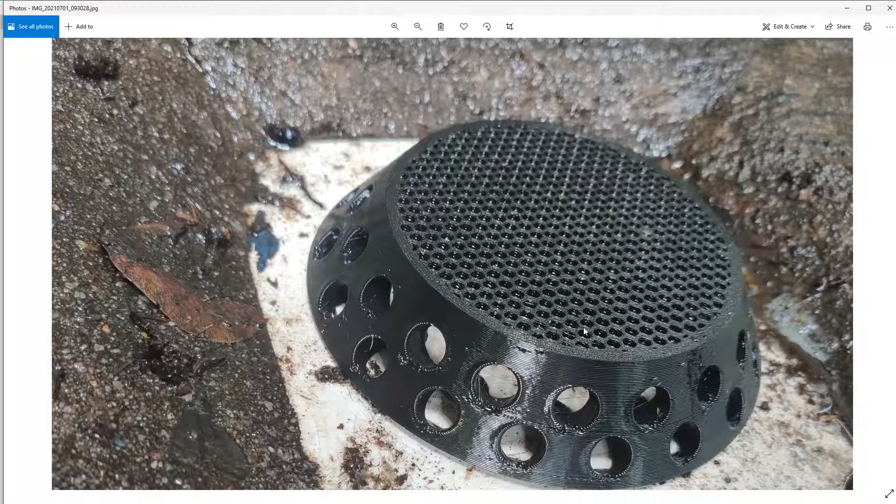What we're gonna do tonight, we're gonna do this drain cover I did. I got some outside steps on my basement, and it likes to get clogged up with leaves because I got enough trees out there. They drop leaves and it's constantly clogging up. This is what I designed. This is what I was working with. Let me see if I can figure out. Nope, not that one. That's what I've been working with. That's what I started. That's what I ended up printing. It basically gives us a lot more surface area, a lot more holes to let the leaves clog up in and let the water still flow through before it ends up in my basement, because that has been a problem.

Oh yeah. By the way, this tutorial, I finally figured it out. It's basically when you go into the bar and you end up sitting next to that dude that won't stop talking about what he's done. Well, have yourself a beer.

We're gonna walk our way through this. We'll try to do it kind of quick. Try to keep it less than 20 minutes. But at the rate I'm going, that ain't gonna happen. I'm gonna try though. All right, here's what we got. This is what I'm starting with. This is what gets clogged up all the time. We got like 12 holes. I counted them. You can count them too. You can hit pause. Go ahead and count them.

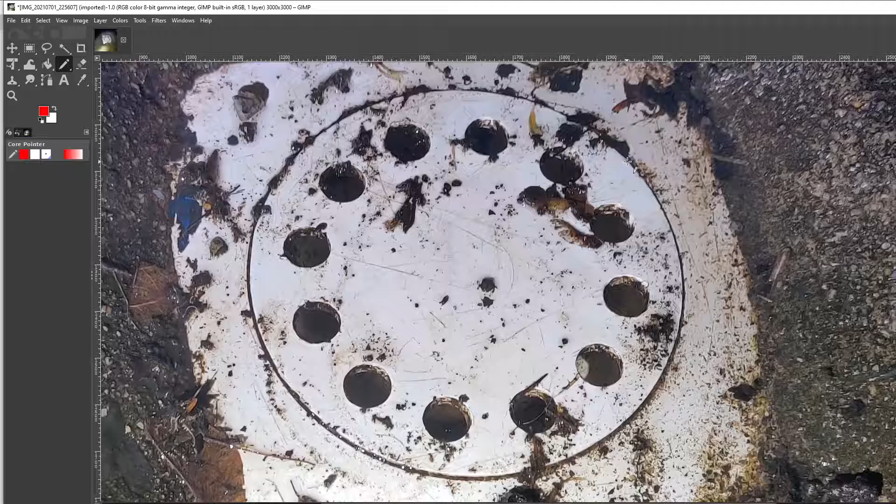I don't care. But basically, what I always like to start out with on the drawing is what I'm starting with, what I got existing for features. So basically, I ended up measuring this diameter right here. That was 115.73. It doesn't really matter if it's that precise, and it doesn't really matter if you can read what I wrote on the screen or not. The other thing I measured is the size of these holes. These holes, they are 12.55. It's easy for y'all to write because y'all ain't doing it and getting recorded.

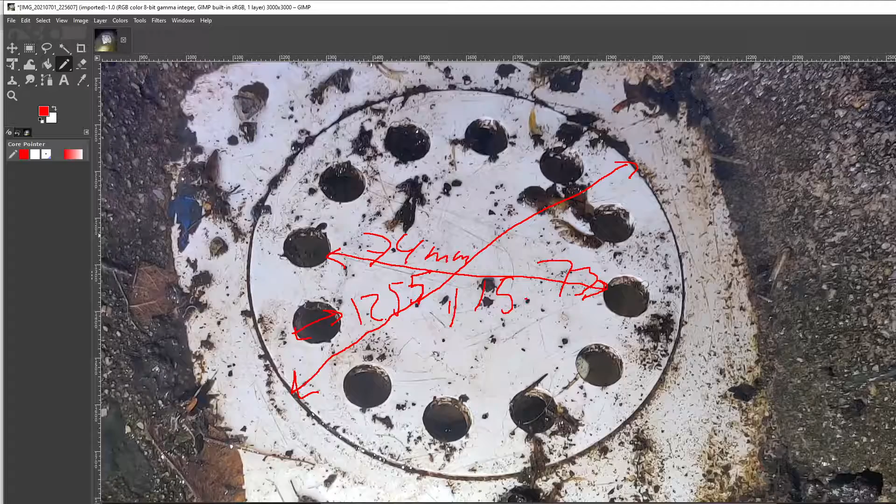The other thing I measured was basically from the inside of this hole to the inside of the opposite hole, and I measured that at 74 millimeters. All of it's in millimeters. I don't know why I felt like adding millimeters to the end of that one. All right, so that gives you an idea where we're starting out. We're gonna close that one, minimize that one. This is my end design. I can kind of walk you through it in steps. We'll just go through it on a new build.

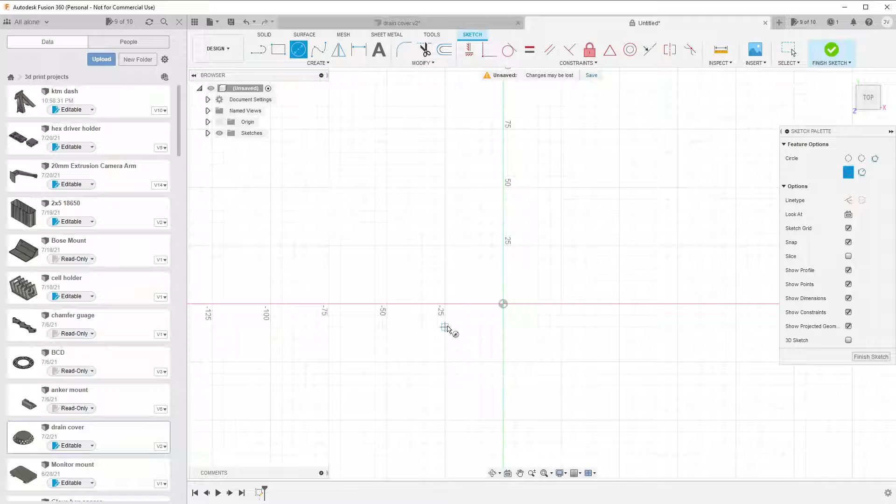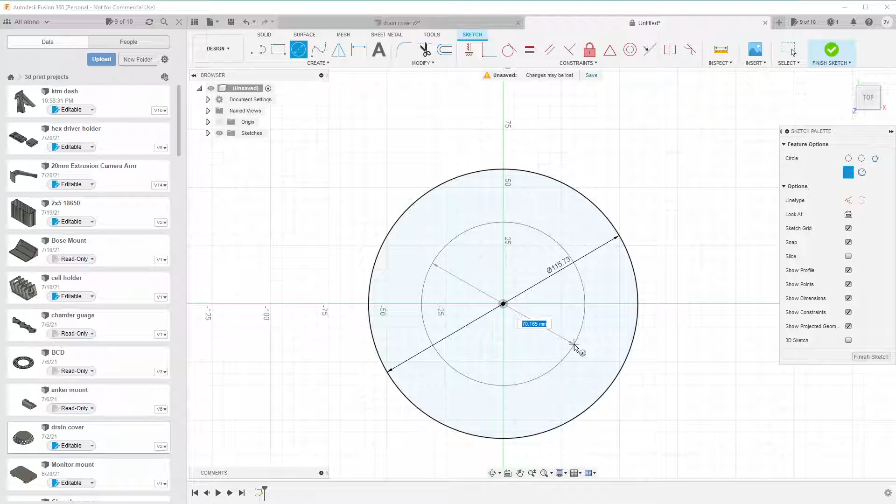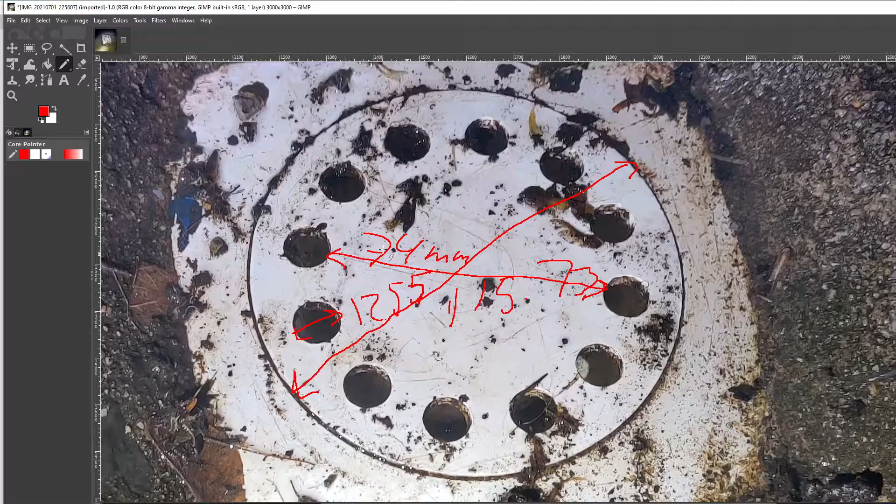We're gonna do a sketch. We're gonna start in the XY, and we're gonna do a circle. First one is gonna be 115.73. That's our diameter of the whole thing. This is how I like to design. You can do whatever you want to. All right, next diameter. We're gonna start from the center, and what we measured was the inside diameter of those holes. Let me go back. Hold on a second. Sorry, man. Beer got in my way. Go back to this one. This hole. I had that as 74. Yep. I'm gonna double check everything. So we're just gonna type in 74.

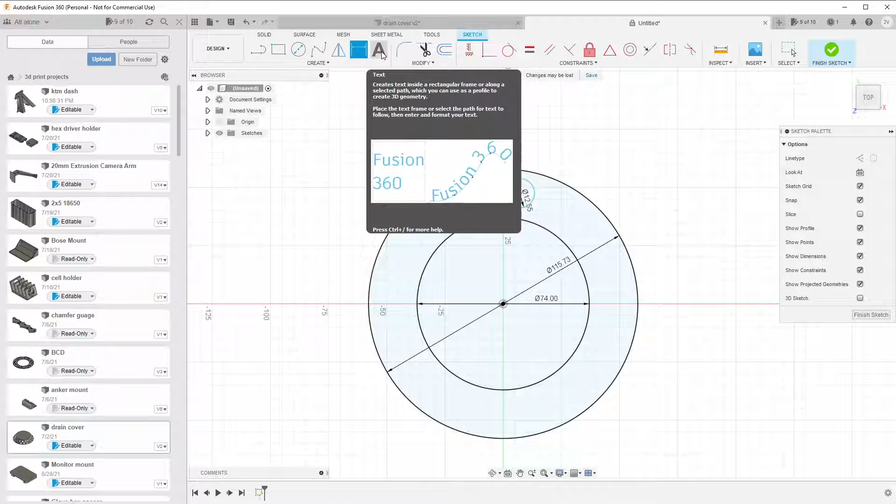All right. We don't actually need to design anything off of that. So what we can do is, well, you know what? It doesn't really matter. We can do a circle, and I have the actual drain holes. They were 12.55. So we can drop one here. No, that ain't exactly right, but we'll go here. We'll go and dimension that with sketch dimension. Click on there, and that was 12.55. Enter, not shift. I hit shift, in case y'all couldn't see my keyboard. And I know y'all can't see my keyboard. Alright, so that's 12.55.

Now we're gonna do this. We got these constraints here. We can tie everything down. We can tie this dude down to here. So basically, we got this tangent of this, tangent of that. Basically locks it down. All right, we're still stuck in tangent mode.

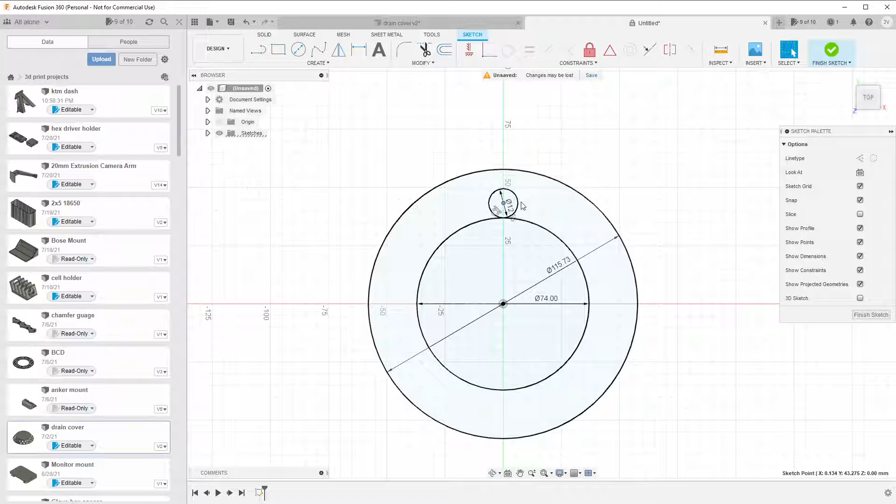So basically, we move this thing wherever along the tangents of that. We can line it vertically. We can do whatever we want to with it, but that's good enough because basically there's 12 of those holes. It doesn't matter exactly where they are. So we can do a circular pattern on that. Circular patterns are kind of your friend if you're doing something regular.

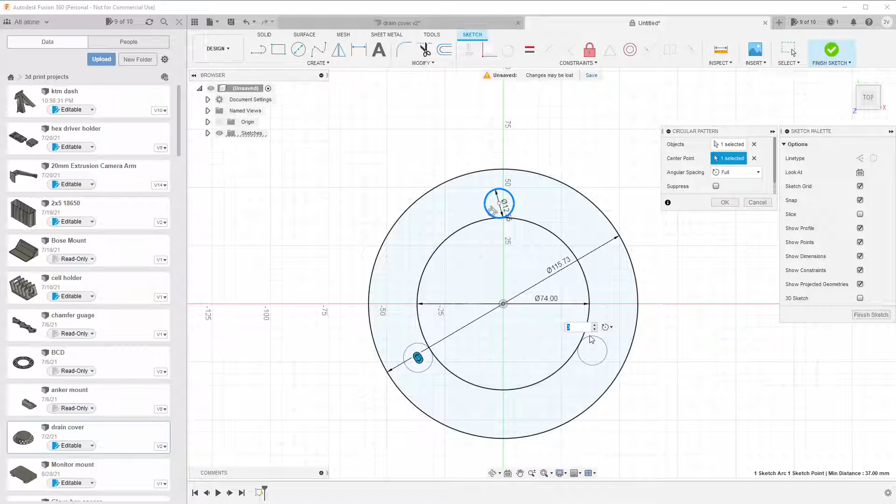Circular pattern objects. It already selected that one. Well, no, it selected the radius of that one. But we can hit the X. We can hit objects. We want that dude. Center point. We want that dude. By default, for some reason, it picks 3. We got 12 of those holes. Alright, that gives us a nice 12 of those holes.

Angular spacing, full. If we wanted 12 of those holes in half of it, we can do that. We can play around with all this. I encourage you to play with all that. But basically, center point is what it's going to revolve around for that circular pattern. There we go. Center point. Yep. Okay. All right.

Y'all gonna have to forgive me because I'm gonna switch back and forth between drawings because I already done this a few times and having a hard time keeping it down to like a reasonable amount of time. All right.

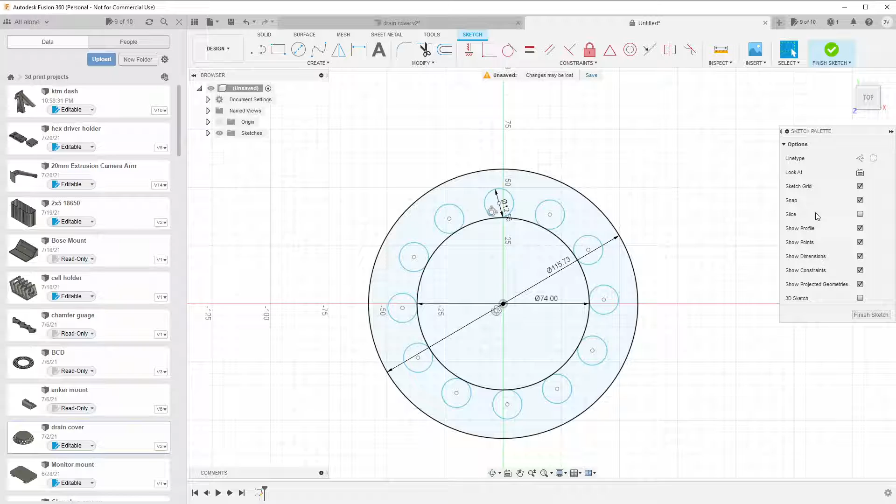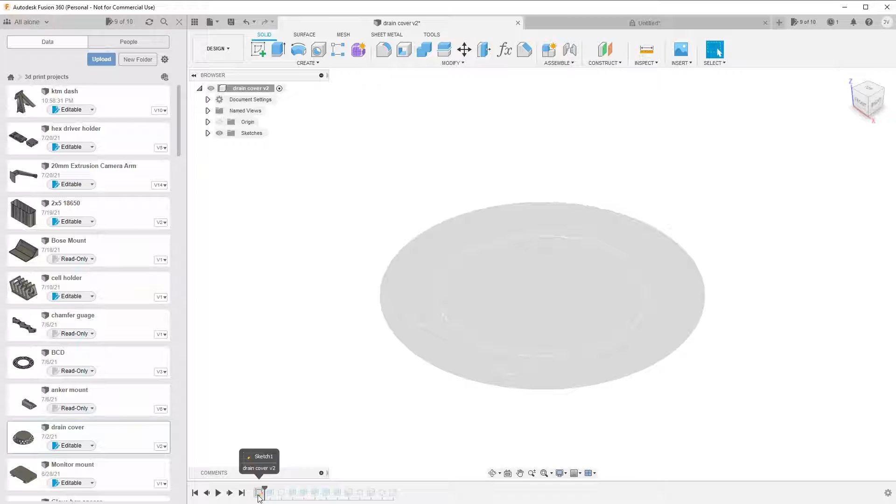Next step. I ended up extruding that. Let's see. This nice thing about Fusion is it's got this history marker. You can drag that back and forth. I clicked on it and drug it, but it wasn't having any of it. We can go back to my drawing here. Let's go there. We'll click on edit drawing because it's basically what's hidden. We'll go to edit sketch.

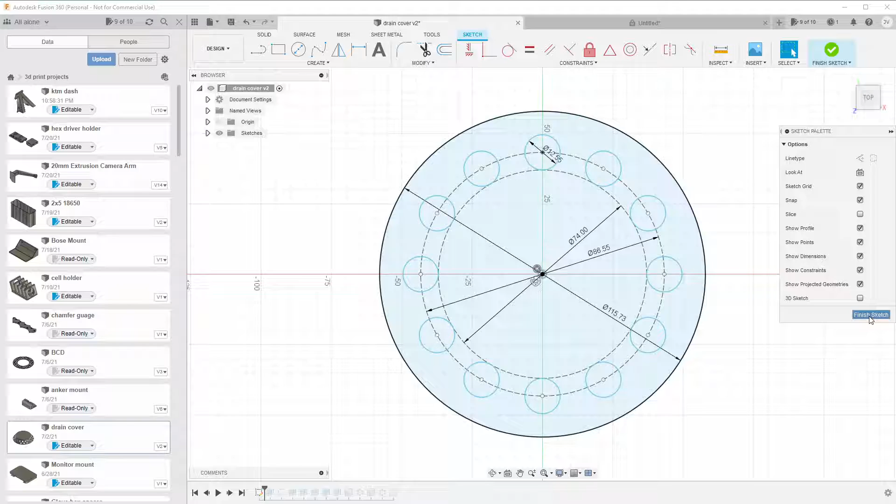I did a little bit different than the first go around because I added in and made it center radius and did all that happiness. But we can do it the way I just did it. Actually works just the same. And then basically what I did was extrude it out so I got a surface to look at. You stop. Maybe it's gonna work. Oh, we gotta hit finish sketch. So it can all disappear. And we won't be able to see shit. Alright.

You know what? I'm just gonna drag it to the end. We'll go through each piece. It works. It's just you got to go through here. You got to open up bodies and open up origins and sketches, and you got to do all that happiness. So basically, let's edit feature. We can see what I did with it. We can see I extruded it 5.14 millimeters.

I actually think I measured that because that's a bit too specific a number for me to just pull out of my ass. I mean, I can pull numbers like that out of my ass. I can pull beers out of my ass too, but don't mean I'm gonna drink them. All right.

So 5.14 millimeters. I extruded it. That gives me something solid to work against.

Sorry, I was getting thirsty. All right.

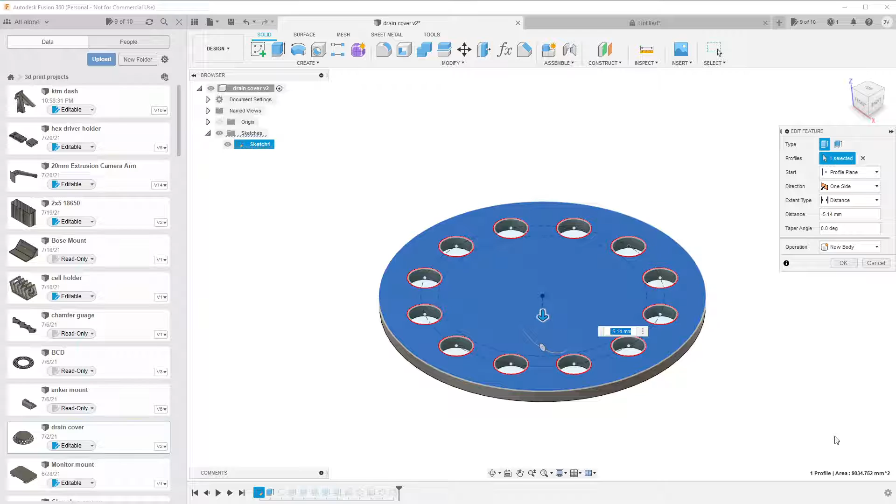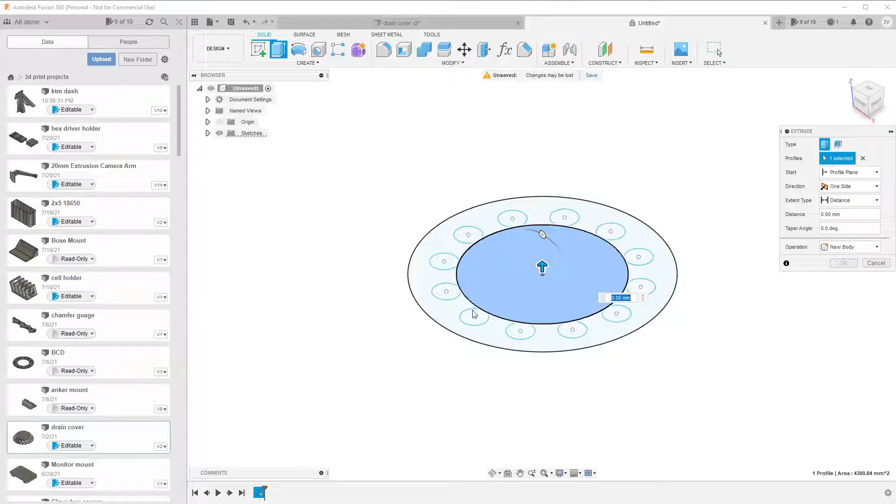Next thing I did was I created a sketch off of that. All right, let's go back to this one. Let's go ahead and extrude this one. Hit finish sketch. Let's do an extrude. Extrude. And select this. Basically, we want to extrude all this. I'm just going to go 5 millimeters because that's a nice even number. That gives me a solid to work off of.

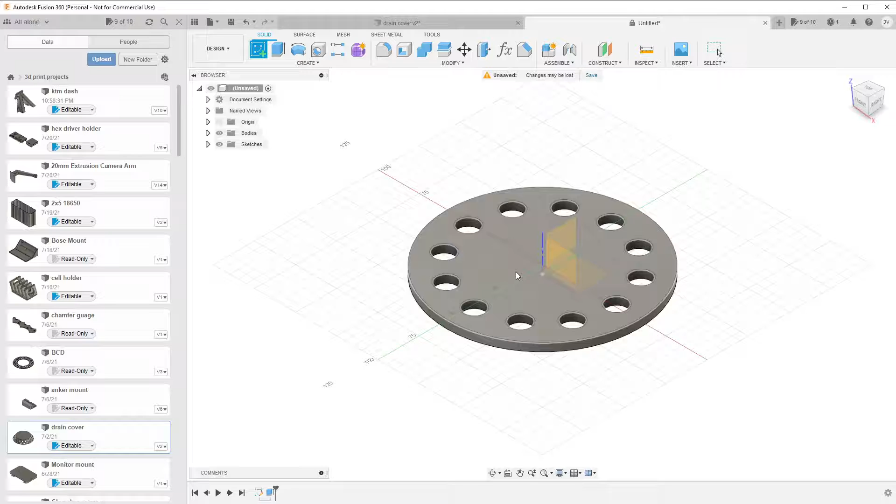Alright, next step. Where was I? Oh, we had this dude. Don't ask me why it looks like that. Alright, so basically I want to do a new sketch. I want to do it off the surface of this. Because when I do it off this surface, it references all this stuff. I get references to all these circles. I get references to basically everything in that solid.

Alright, so what I think I did, here, I did a circle. If it tries to snap to anything, for our intents and purposes, we don't want to do that. We just want to kind of do it in the middle, or we can hold down the control key. That keeps it from snapping to anything. So if we just hold down the control key, we can then just draw that out. And I think I just chose like 5 millimeters for the diameter of that.

And then I want to do the tangent again. So I want the tangent of that one to be the tangent of that one. And that gives us a little post there, because basically what I'm doing here is I'm drawing a little post down that I can reference on that'll kind of lock into that existing cover. Because I don't really want to get rid of that existing cover. It's tough. If I break my little 3D printed part, ain't no big deal. I will not break this part because it's been going strong for 20 years or however long I've been here.

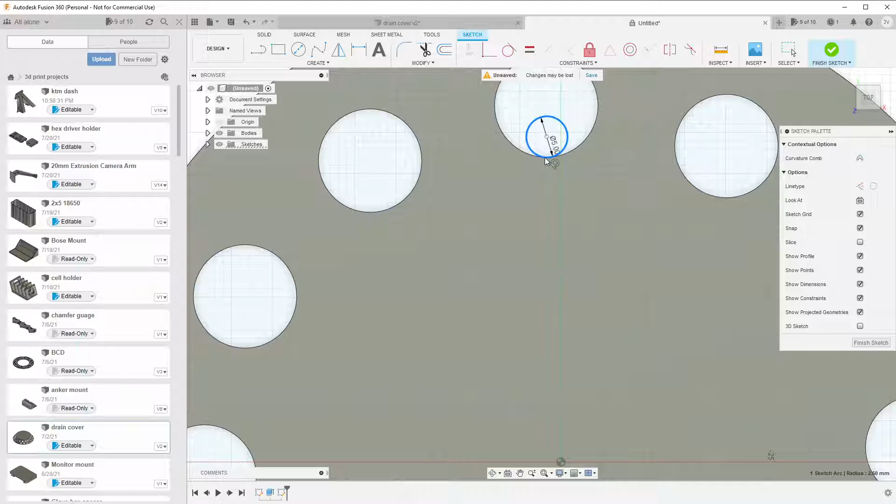Alright, so y'all see I'm still stuck on the tangent. I'm going to hit escape to get out of that, and then I can draw this down. And I'm sure there's a better way to do this, but I'm going to do it the lazy way and the drunk way, because normally I would align this hole with the X or the Y axis, whatever axis that is. I'd have aligned it with that, so we could just line this hole with that axis, and we'd have been done. But anyway, that's how we're gonna do it, because it'll get us close enough. I mean, this is not rocket surgery. We just need to get close enough.

So basically what I'm doing is I'm making little pegs to reference these holes to keep it from spinning, to keep it in place. And I'm gonna do 6 of those. We had 12 holes. I'm gonna do 6 of those. So I'm gonna do the circular pattern again. Create circular pattern. Create that dude. Well, shit, I just deselected that dude. We're gonna select that dude. Center point again. We're gonna click on our origin here, and then we're going to change this quantity to 6. That gets us 1 at every other hole, and that shouldn't block up too much, because we should be catching most everything with our cover that we're actually creating.

And you know what? Let me look at this other cover I got here. Oh, you know what? I created an outside one. Let's check what the dimensions are on that. We get this inspect. We can click on there. Oh, it ain't gonna be happy with me. Inspect. We'll click there. We'll click there. Distance 65. I think that's the diameter. Yeah, that's the radius. Yep. It even shows us on the screen there.

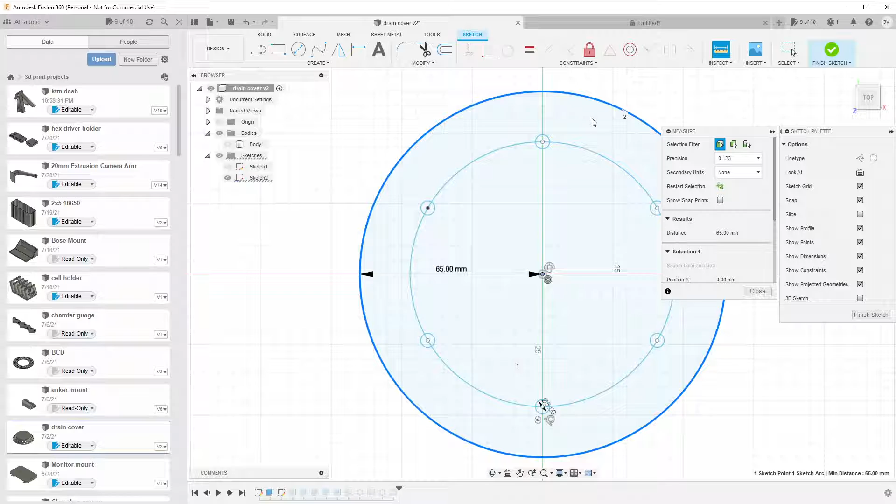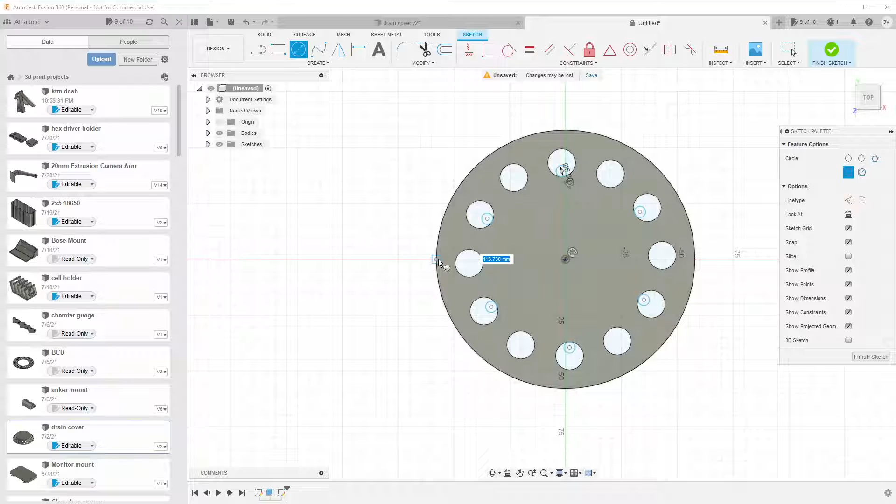All right. So I just guessed 65 millimeters. We made it bigger than what it was. It's showing me that. So let's see. We'll do a circle. That was a radius of 65 millimeters. So we're gonna do 65 times 2, because y'all know Fusion will do math for you. You don't need to do it for yourself. All right, we're gonna do finish sketch on that. Let's see what else I did here. We'll do finish sketch on that one because that's that one.

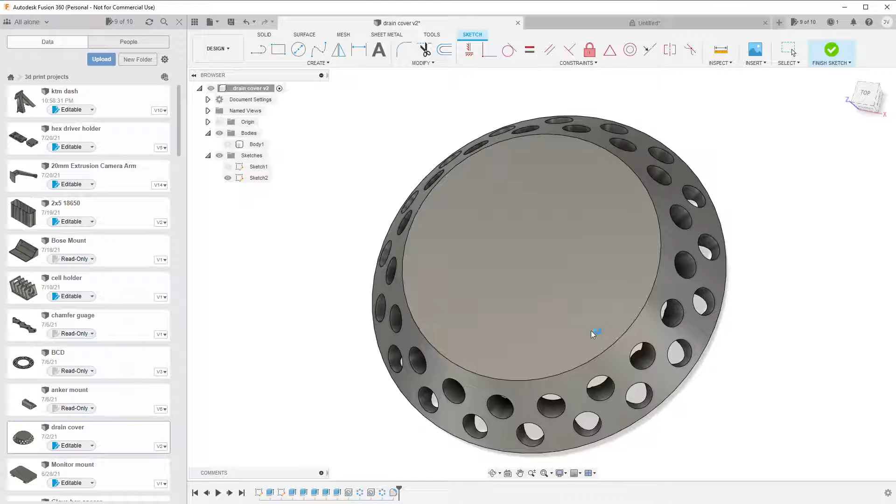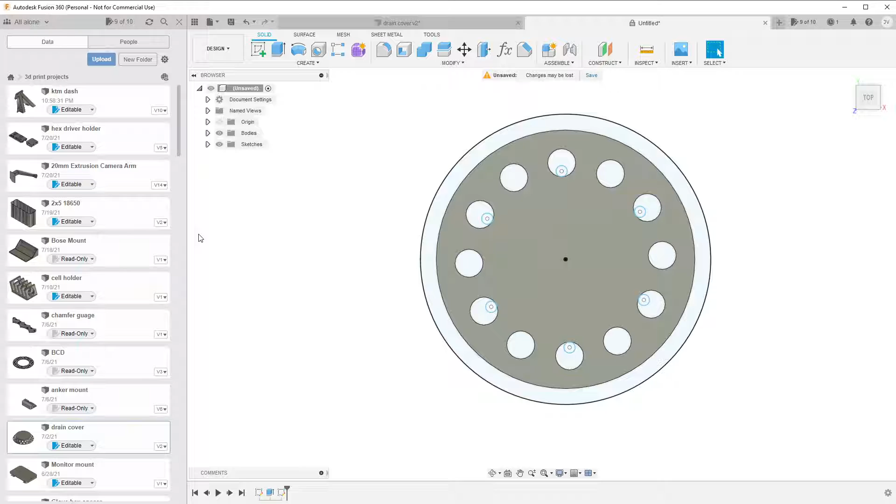All right, what do we have next? We're just gonna slide this timeline. Oh, yep, we did an extrude. We can do this edit feature. I'm gonna go through on this one. We extruded. What did we extrude? We extruded this outer side at 35 degrees. All right. So we can go here. We'll go to this home. Look at this ISO view.

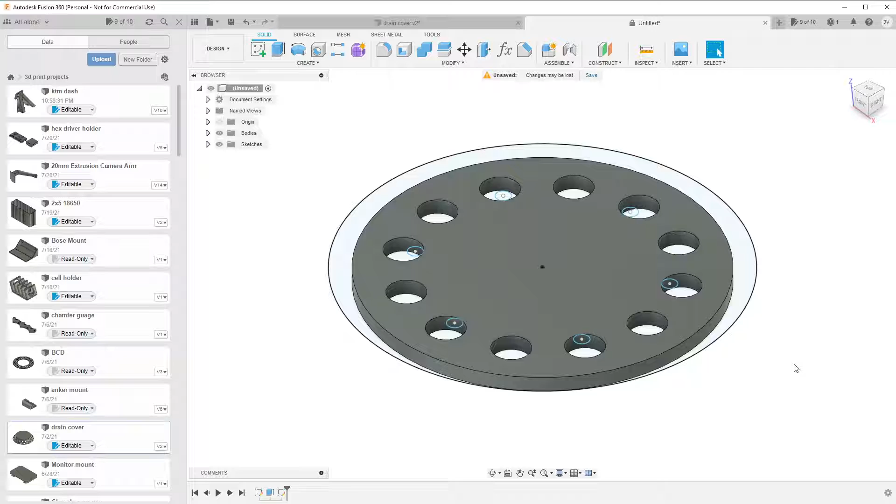Basically, if we extrude, click on that one. Let's go ahead and click on that one. We click on all of it. Well, that unhighlights everything. But click escape. We're going to click on extrude. We're going to highlight all of it. We're going to extrude up. How far up do we go? Edit feature. So you can see we highlighted all the features here. We extruded taper angle minus 35 degrees. Yep.

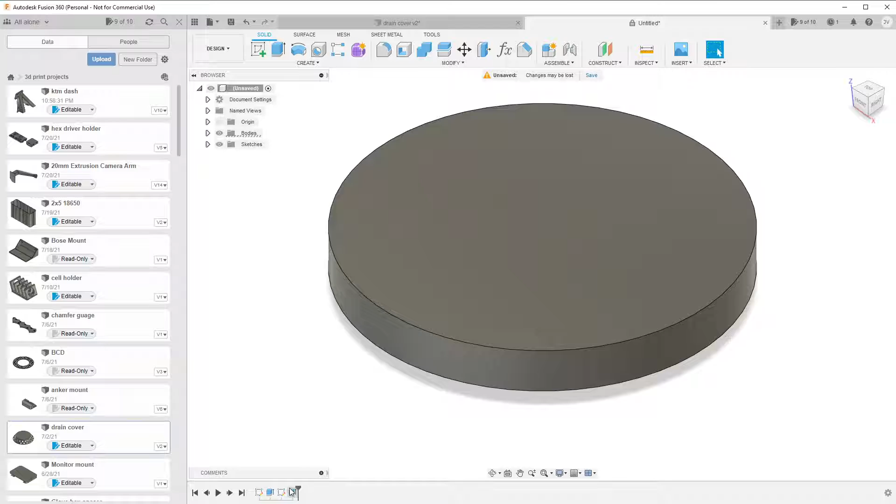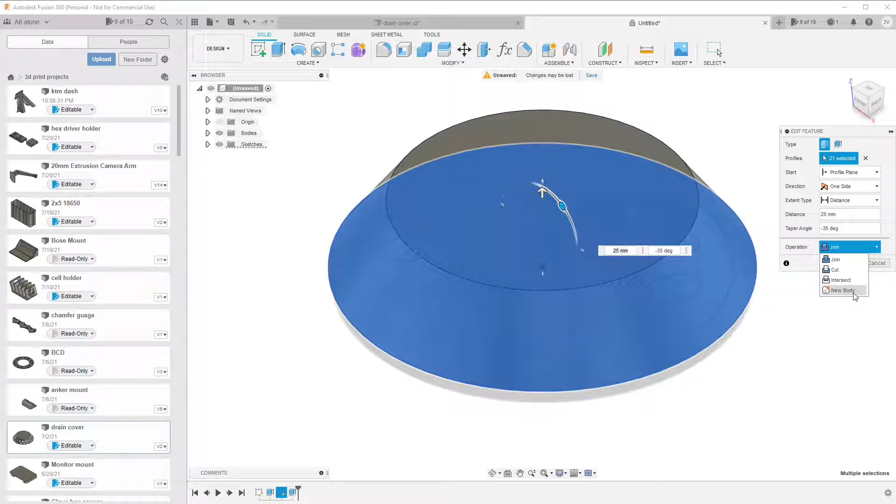Edit feature. Taper angle. You can click in here and drag in and out, and it'll kind of taper in, taper out. And you can play with it and see whether you need negative or positive. We want minus 35 degrees. That matches up with what I had. The distance, I'm going to go 25. So that operation, we don't want join, because that's going to link it to this bottom part. We're going to do new body. We can always link it later on. Here, let's go to edit feature. See how far we went on this one. Hey, we want the same distance. All right, so we don't need to change that.

Next thing we did was we extended all these pegs down. Basically, we selected all these 6 pegs on that sketch 2. We can go here, drop this down. We got that sketch, see all these pegs, we can just extend those down.

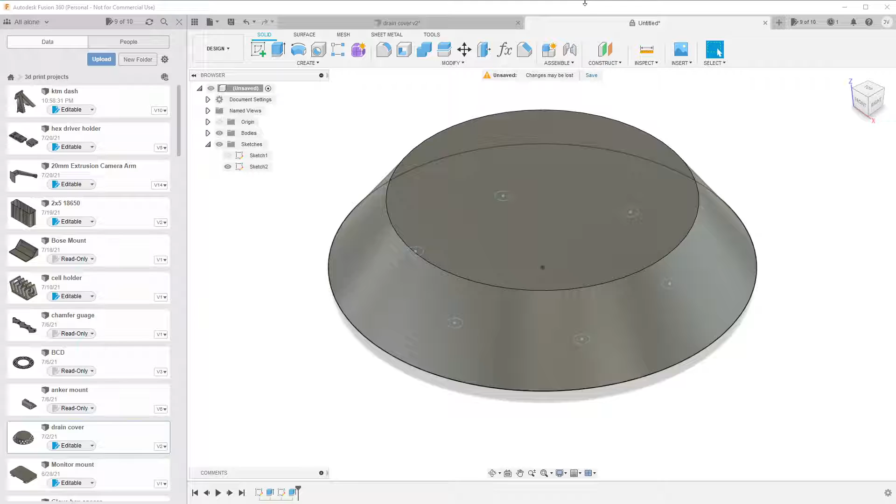I'm just going to go back here because that's going to be a little bit quicker for me. So we can go to edit feature. We extend them down 6 millimeters, just gives it enough to kind of hold it in place.

At this point we got this body 1 turned off, so we're just not going to try to join it to that body 1. I'll show you - it's got those. We turn that body 1 on, it's going to try to join them to this bottom piece, and that's basically the piece we put in there to have something to reference off of to see how it was going to do.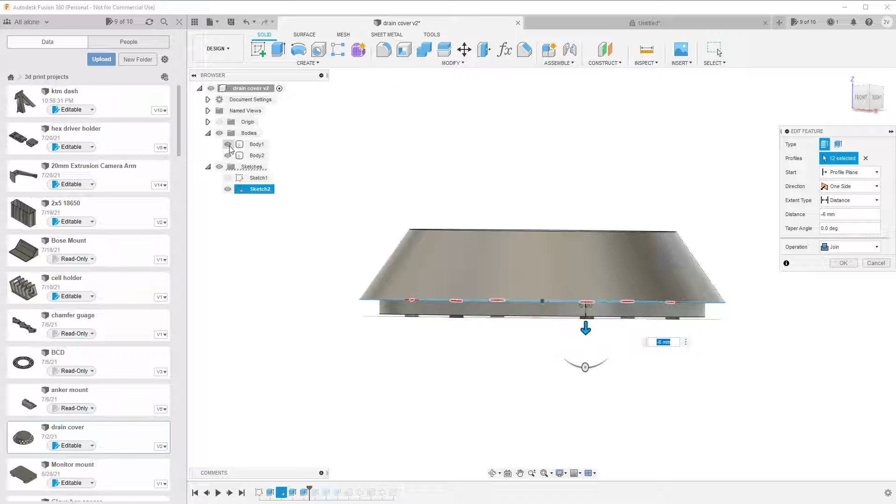So if we turn that body 1 off, we can extend those pegs down, and we can do join. I don't know why it's got 12 profiles selected, but basically it's these 6, I guess it's the center points, and we're extending minus 6. So, all right, join. Now you look at this, we got these pegs sent down. Next step.

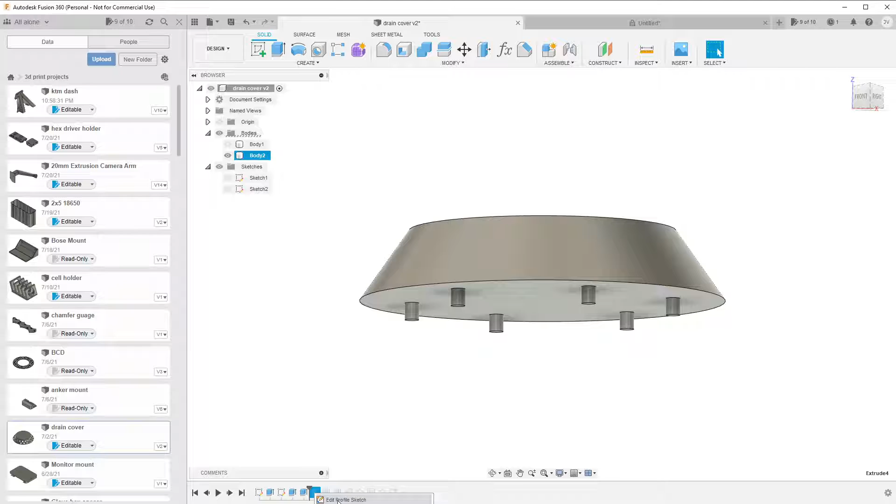We're going to edit this feature. We extended these pegs up. You know what? I have no idea why I wanted to do that, but we're just going to go with it.

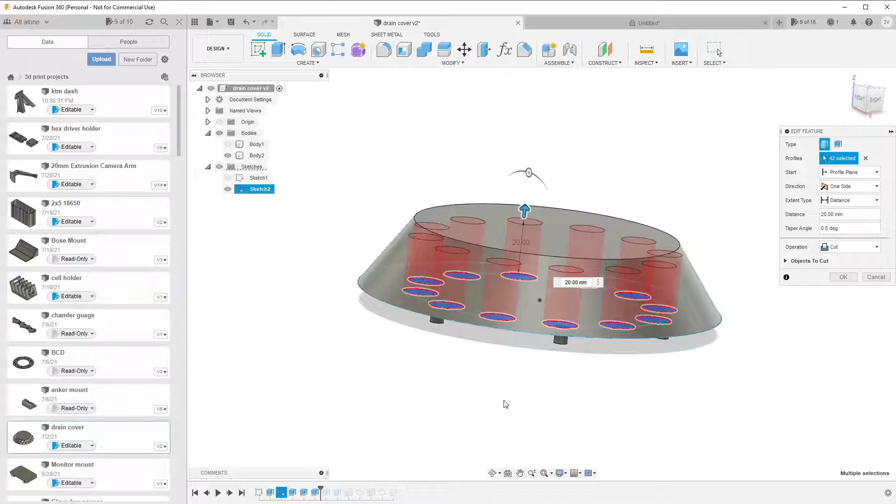We extended from that sketch 2, we extended those guys up 20 millimeters. All right, that leaves us - yeah, I kind of know why I wanted to do that. That leaves us 5 millimeters because we extended this whole thing, this initial thing, up 25 millimeters, so this gives us 5 millimeters on the top.

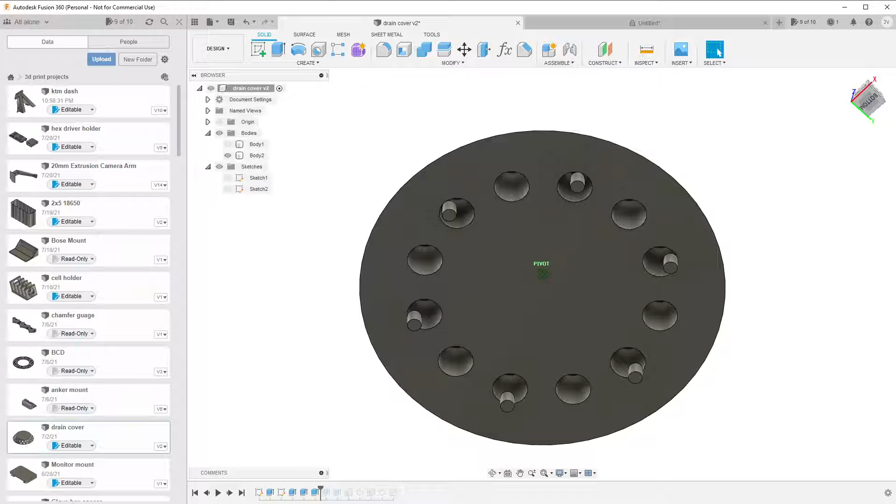So that extends us up, and we wanted to cut that out of the existing thing. All right, so now we can kind of look at this. We got these nice holes in here to allow water to pass, hopefully no leaves to pass.

We go to the next step. And I don't know what the next step was. Let's edit feature. Alright, so basically what this feature was, we wanted to give these pegs something to anchor to, because when we cleared out all these holes, there's nothing to anchor to, so we basically selected this, and this,

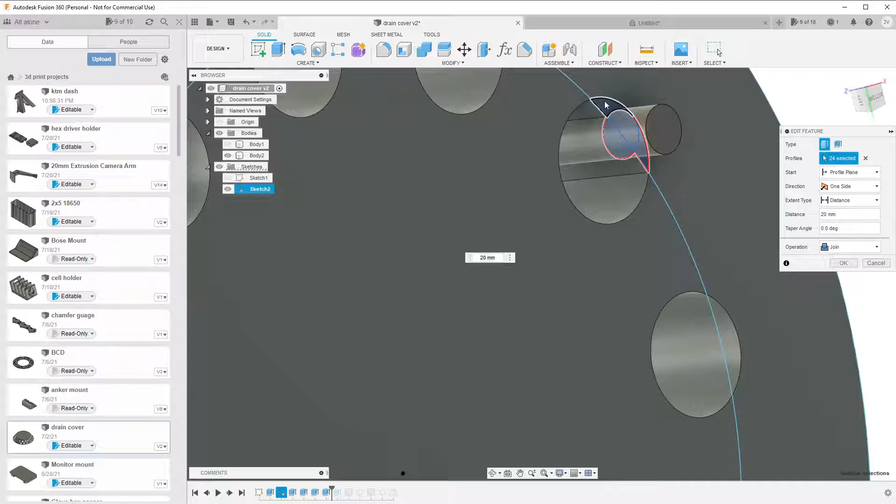times 6. So that basically these pegs have something to anchor to in this dude.

And, I know I ain't doing a great job of explaining this. Y'all just gonna have to take my word for it. Y'all gonna have to hit up the comments and tell me I'm a dumbass, and I'll go through it again. Because I will drink more beers, and you'll drink more beers with me, and I'll go through it and explain it, what had happened. But otherwise, y'all just take my word for it that we didn't.

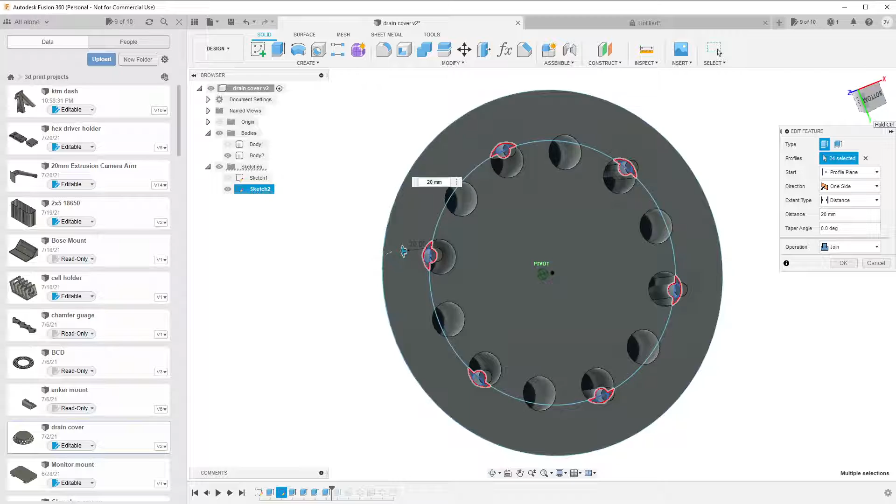We added in these sections. So we added in this section, we added in this section, we extruded that up through. So we got some continuity, we got something to connect in there. It ain't just like we got this random ass part there trying to stick to it.

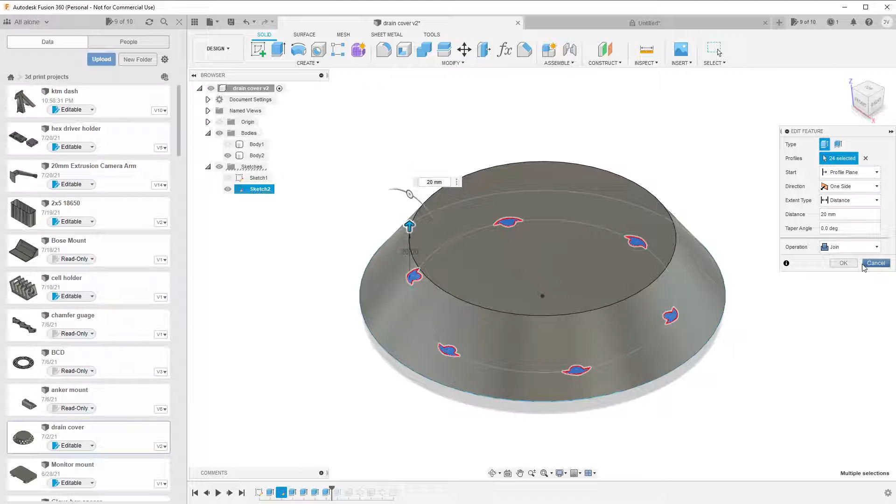Alright. It's been a while since I've done this design, and I'm kind of going back to it one step at a time. Alright.

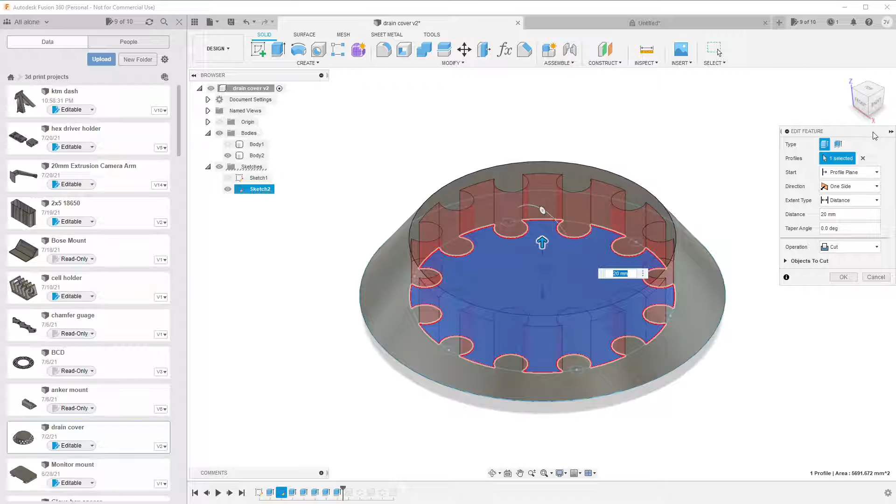This is where - alright, so what we did on this one, we pushed this bottom up 20 millimeters. So it's basically we left 5 millimeters at the top, we got 20 millimeters at the bottom to kind of open it up, give us some storage space in there. So we just extruded this bottom section up 20 millimeters, and we made a hole in there.

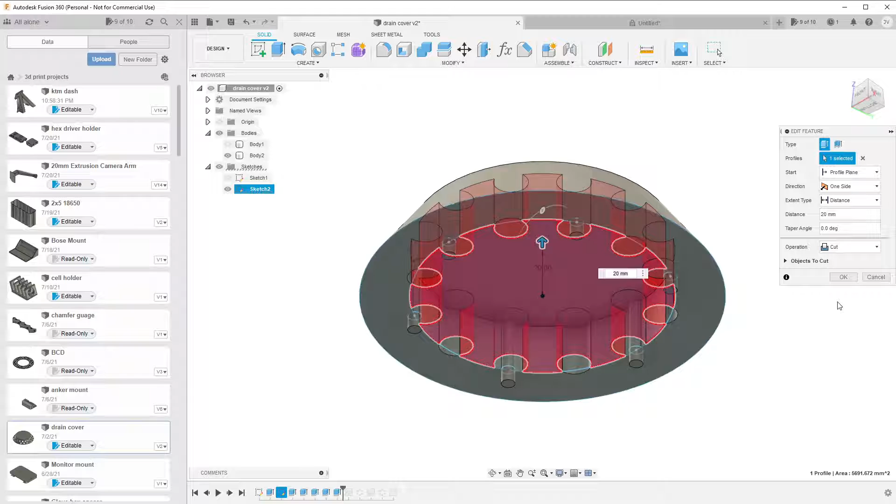All right, that's most of it, and we're gonna make all the holes in the top of this with our slicing, with the slicing technique. We're basically gonna get rid of the top and bottom layers. When we slice this, we're gonna print this side down. We're gonna get rid of the top and bottom layers when we slice that, so we can have nice continuous - it's the easiest way to get holes through it, if we just skip top and bottom layers and do like a honeycomb pattern.

All right, next thing, we're gonna do a hole. We're gonna create a profile. We're gonna create a hole. Let's see, how do I do that?

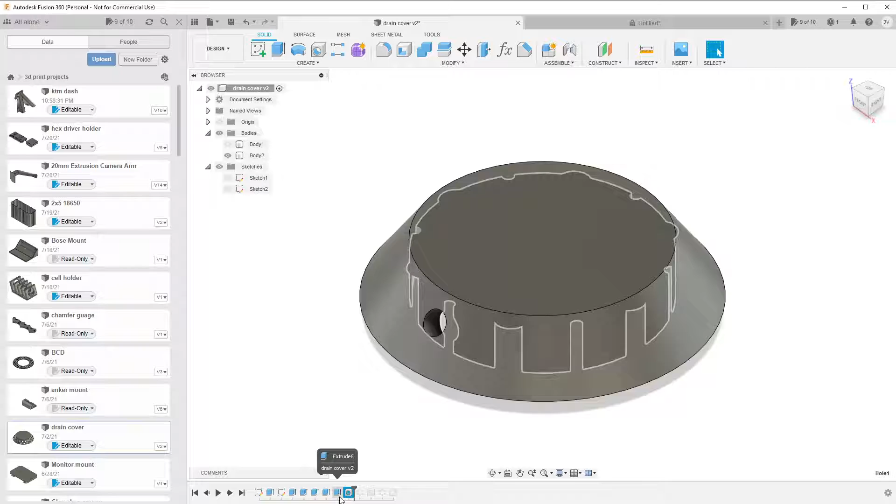Oh, we got this tool here, right here. So let me roll this thing back. I'm gonna roll it back one step. I'm gonna create a hole, and I'm gonna click over here.

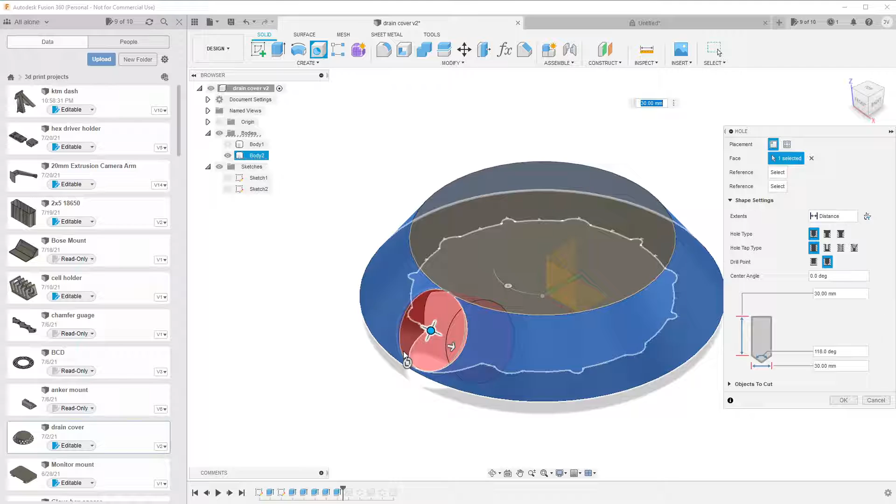I can click here, or I can click, and it's basically gonna line these holes with the X, the Y, or the Z. I can click over there... well, I can't click over there now. I'm gonna do a hole. But we'll click one here and see how it aligns. I think it's gonna try to align that hole with one of the axes.

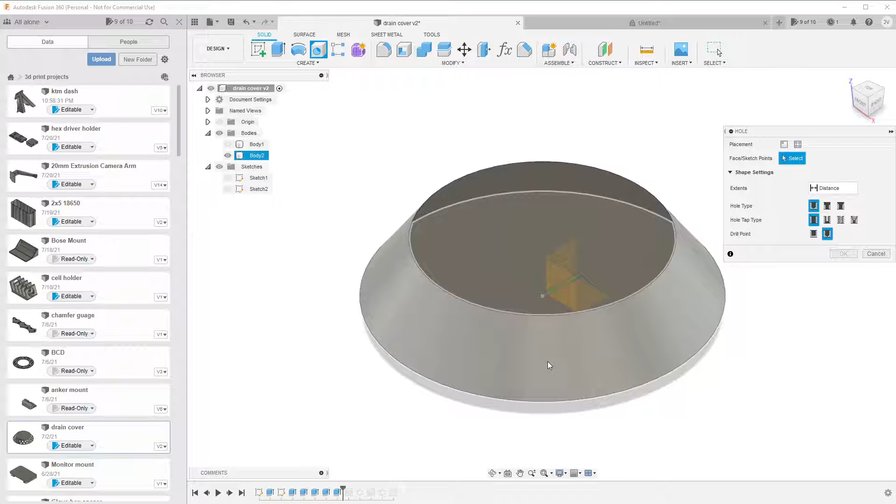I click in the middle. It aligns with this red axis. I think, yeah, that's X. Red's X, the green's Y. Basically wherever you click, it's gonna try to align with that axis.

And we're gonna make that a reasonable size. It kind of gives you this picture here with what size it is. So let's go 10 millimeters. I didn't mean to hit enter. So we can go back here to edit feature.

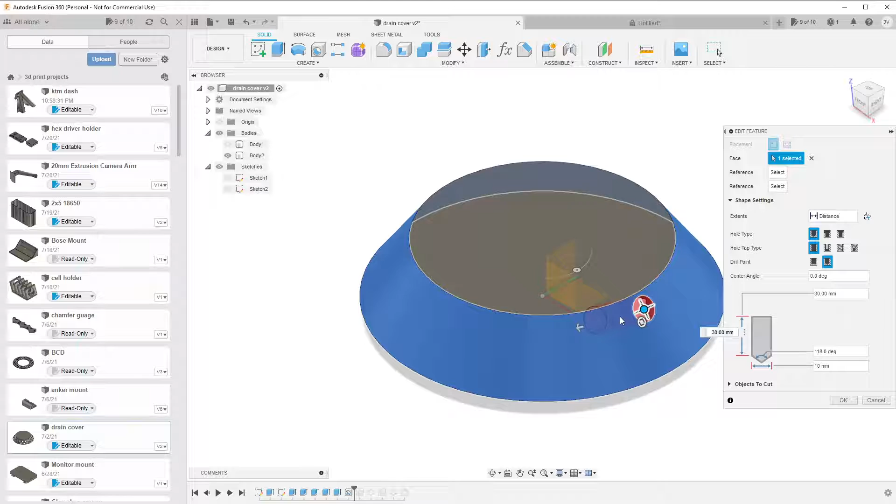So we get to change that to 10 millimeters, and now we can drag it up, or drag it down. Well, I can't change what axis it's on now. But basically, that's what I did. I created a hole through it like that, because it's just going to drill through whatever face I select at either the X or Y axis. If I had clicked on the back side of it, it would try to drill on the back side of it. I'm just gonna click on cancel.

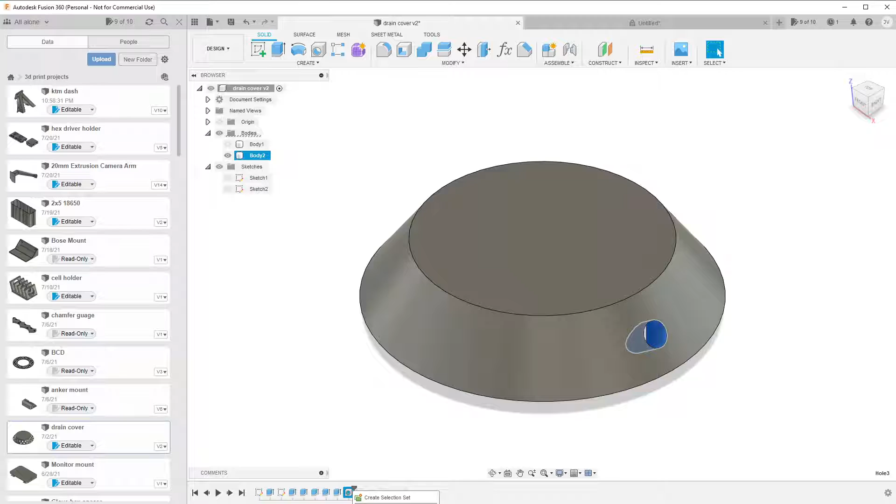I'm gonna delete that because I already had this one. We're gonna slide that. Let's see, edit feature: 10 millimeters, clicked here, and I drug it to here.

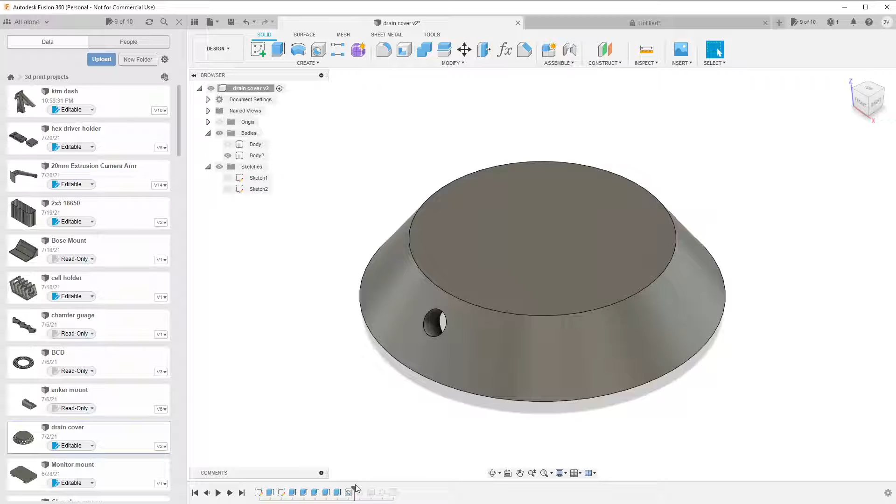And then we got a circular pattern again. That circular pattern - all the patterns are friends, because they make things a whole lot easier. I'm just checking time right now, and don't want to... well, hell, I can't see what time it's been. It's been too long.

All right, circular pattern, that's the edit feature. 18 holes - all right, well that gives us 360 degrees, 18 holes. That gives us one hole every 20 degrees. That basically ends up lining us perfect for setting one off at 90 degrees opposite that. That's why I did that. That's my story, I'm sticking to it. I definitely didn't punch in a whole bunch of different numbers in there and try each one of them.

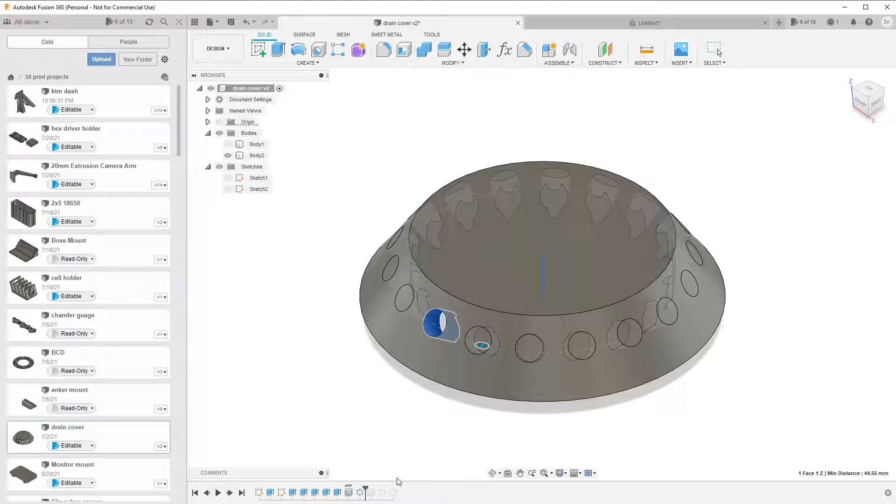All right. So second hole, I did that one at 90 degrees. I did one on the X, one on the Y, or well, vice versa - I did one on the Y, one on the X, and then I did the same circular pattern for 18 holes.

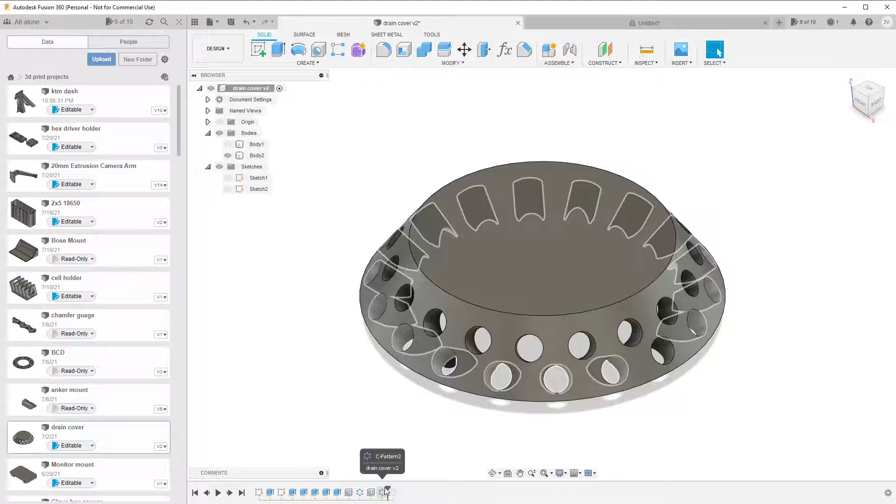And then I stuck a chamfer in there for something. I have no freaking clue why I stuck a chamfer in there. Oh man, yep, I think that's cosmetic as much as anything. All right, so we're almost done with this.

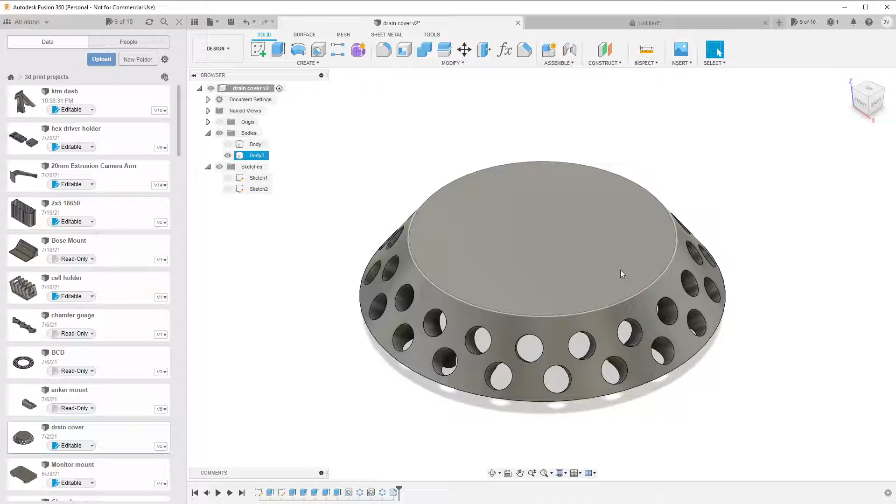All right, Fusion, we got this body. This body, we can highlight it over here. I don't know why y'all looking at all my documents. All right, this body.

We're gonna save as mesh - that's how we're gonna export it. Export it as an STL, or we can send it straight to a 3D print utility. I'm gonna send it straight to the 3D print utility.

I've been using Super Slicer, I like it a lot. It's kind of like... not Fusion, Prusa Slicer. It's like Prusa Slicer, only it's got a bunch of add-ons in it. It's not quite as stable as Prusa Slicer, but it's got a whole bunch of add-ons that kind of make it worthwhile. So that's what I've been running, Super Slicer - I like it, I like it a lot.

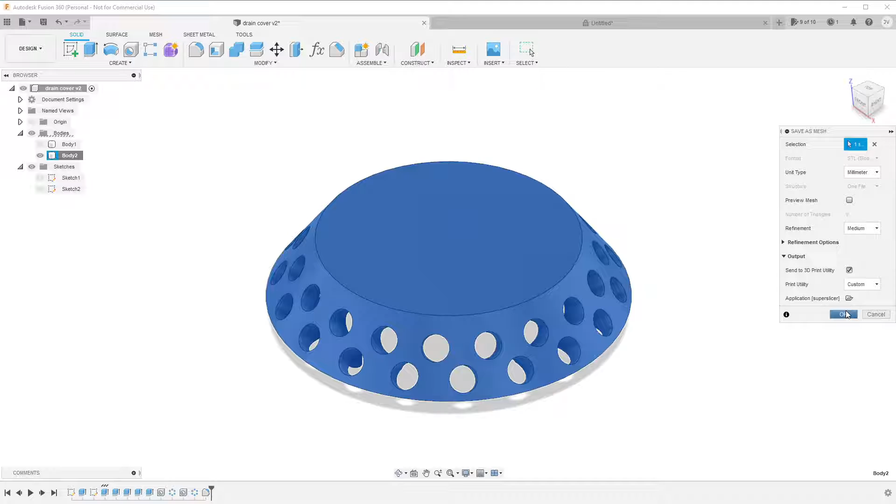All right, we're gonna send it to Super Slicer, and I'm assuming we've got all this stuff set up in here. You can't see, but part of that, I'll drag it over into where it needs to be, as soon as it opens up, if it opens up, eventually.

Come on. I guess it's telling me I need to drink more. I still got beer left.

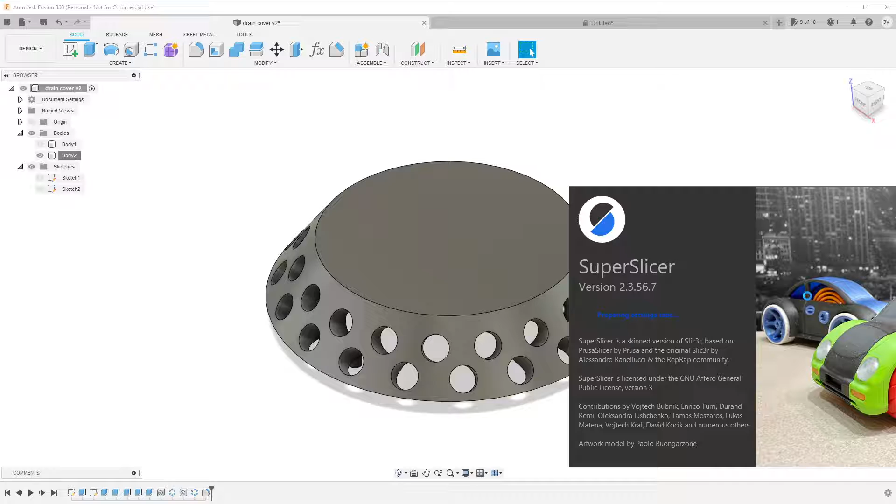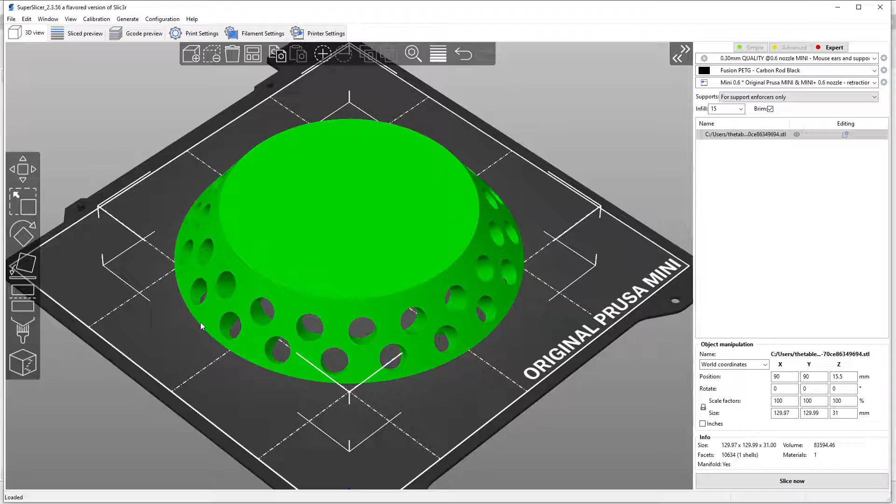Holy crap, that's big. Let me try to get that down on some kind of screen where y'all can see it. Eeny, meeny, miny, mo, that'll work. All right, that's what we're working with. But y'all remember, I put these pegs down here earlier. Those things are gonna be a pain in the ass to try to print all this crap on.

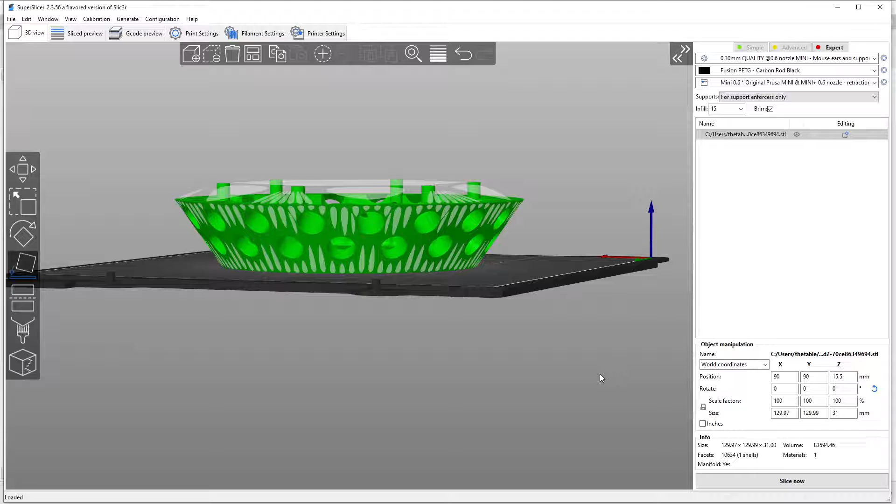We can do supports, but nobody wants to do supports. So basically, what we're gonna do is flip this thing over, hit place on face, and select that face. That thing's got it upside down, so it's gonna basically print from the bottom up.

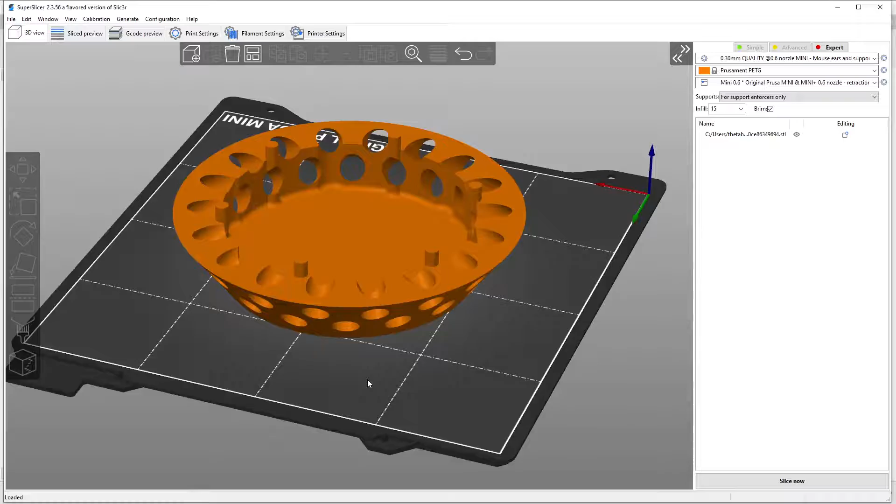All right, let me change this thing, let me find a different filament. We'll go with Prusament PETG, that'll at least show up on screen. All right, now y'all can at least see what the hell I'm doing, instead of staring at a black screen with black shading and black tint.

What are we gonna do now? We're gonna do a modifier on this print. It's gonna work pretty much the same in... well, you know what, I'm gonna change this up. I'm lying, it's gonna work pretty much the same in Prusa Slicer. I'm trying to talk and do stuff at the same time, and my brain doesn't work that good.

So because, well, I've been drinking. All right, we're gonna do... there should be a height modifier. Add height range modifier. All right.

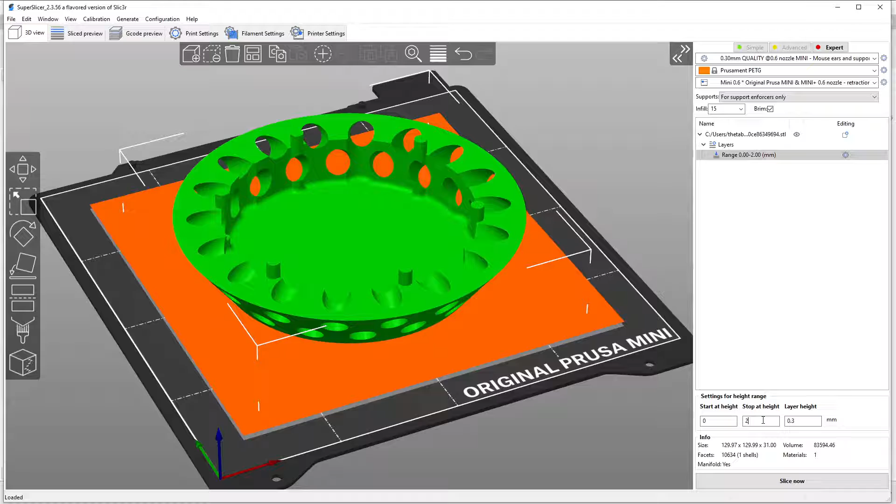Y'all remember when we were designing this thing? From here to the bottom was 25 millimeters, that's how far we extruded it. From here to here, we did 20 millimeters. So we're gonna edit this range, we're gonna do from 0 to 5, because math.

And if y'all really want, we can go from 0 to... it'll actually show up better if we do 5.1. Now you can see we got the orange on here. I'm assuming you're not colorblind, and if you are, I'm sorry, I can't imagine.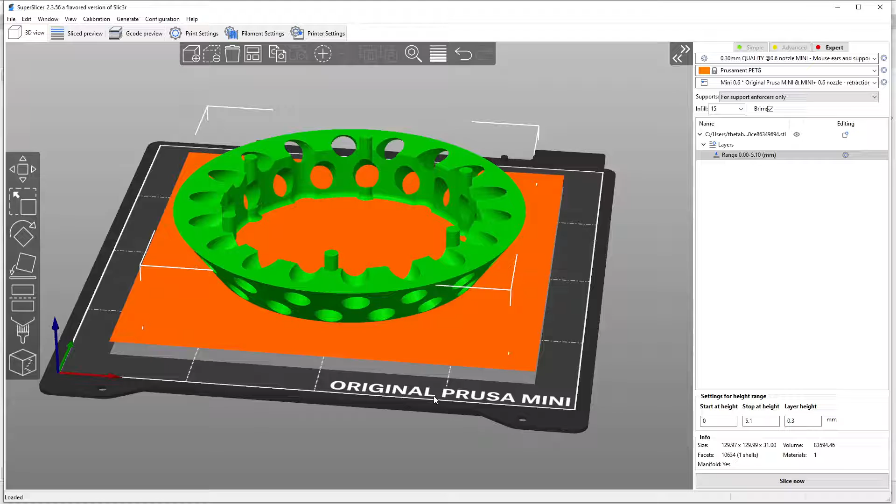So basically we got that height range modifier, and on that height range modifier we can do... let's see, we want infill. For that infill, we're gonna do 15%... well, let's do 13%. Fill pattern, we don't want any of the 3D because that's just gonna block things up. We're just gonna do a straight honeycomb.

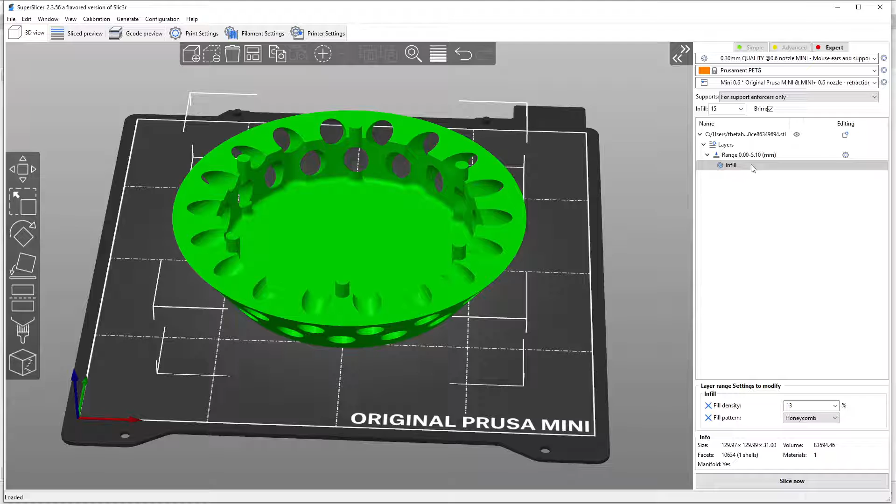So we can do a slice now, but the problem is we still got the top and bottom layers. But you can see, man, this ain't what I want to be dealing with. All right, let's go back. All right, you can kind of see we got this.

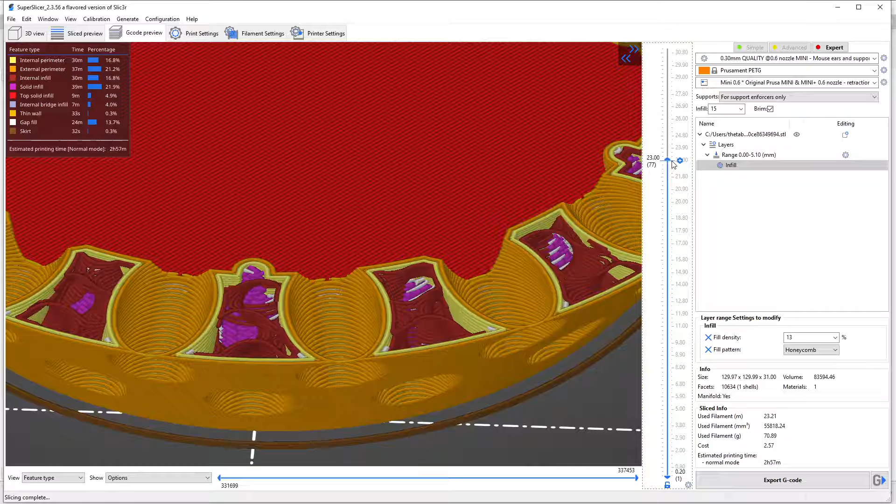We got whatever it is with a 3D infill. As soon as we get down to here, we got this just honeycomb, no 3D. It should let water just pass right on through. That's basically what I'm looking for. I want something like stand on... well, kind of stand on. I'm fat, so... but we want to do.

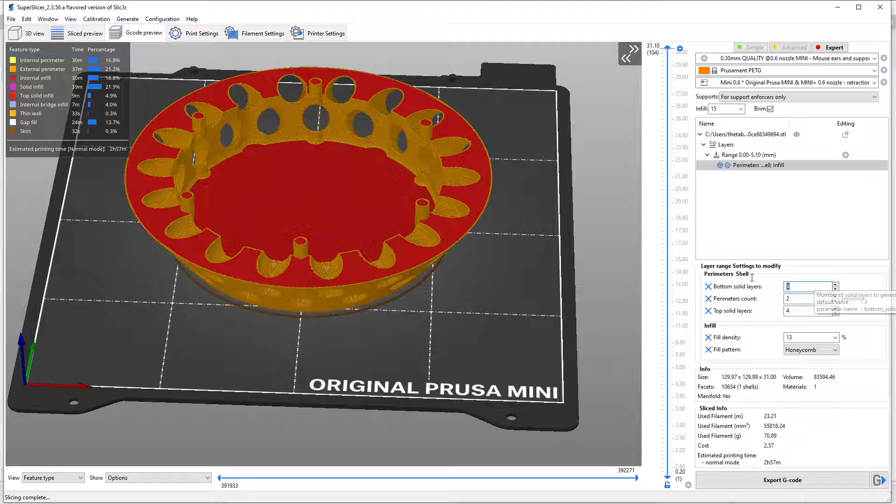We want to add... let's see, we want perimeters and shell. So basically, what we can do here, we can get rid of the bottom layers. We'll put 0 bottom layers, and put 0 top layers. And we'll leave that alone because we're all good.

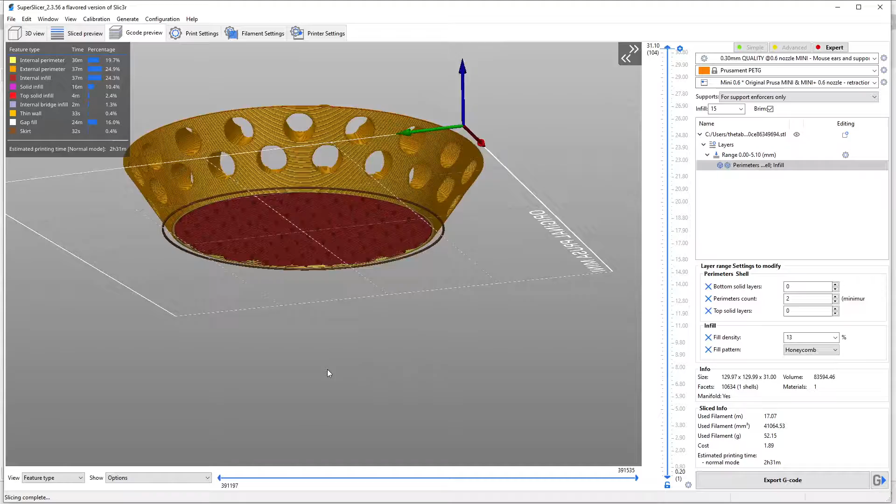And now, if this thing would finish slicing, you'll see this is a slice view. We got nothing but honeycomb. But that honeycomb looks a little bit sparser than I want, because I want something to hold more stuff out of it. I don't know if that's right or that's wrong, but we can change that fill density right here.

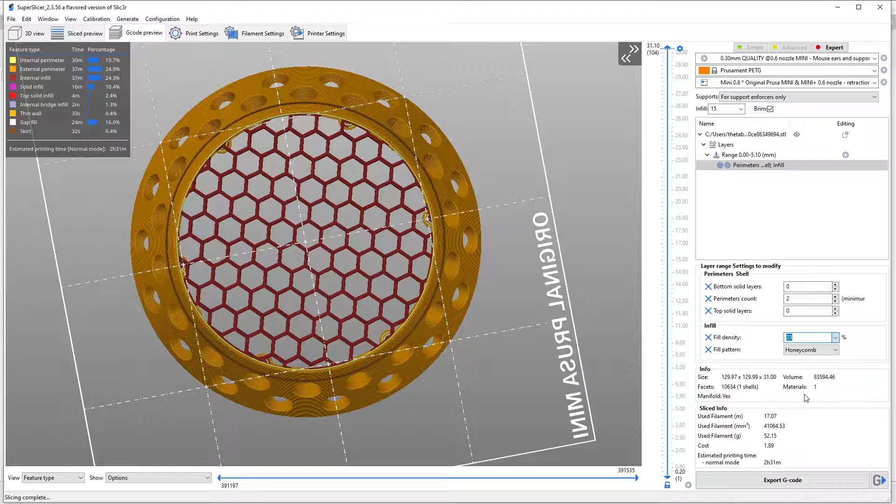Let's change it to 23%, that'll tighten it up a little bit. Oh, we got sliced again. And I think that's basically... man, why are you going to be like that? All right.

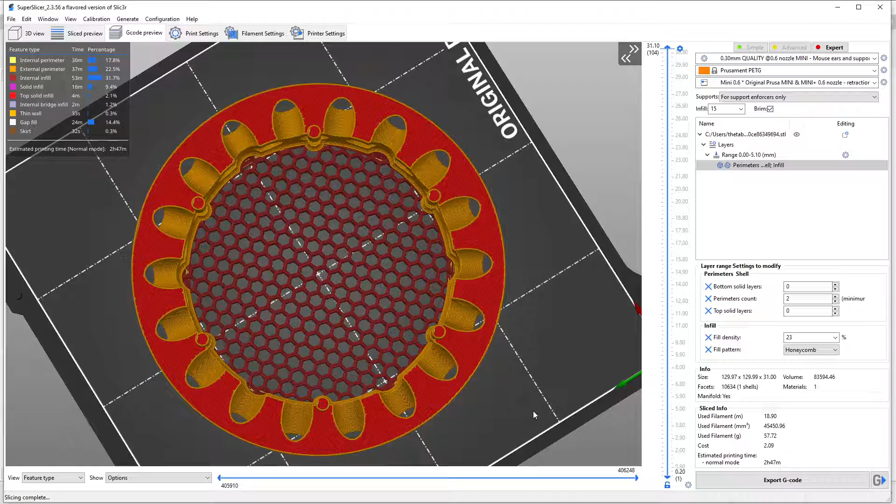That's basically where I ended up with it, I think, or right about there. It doesn't really matter, you got to experiment with this stuff, you got to play with it, you got to see what works for you, because that's what this is all about. I'm just trying to point you in the right direction.

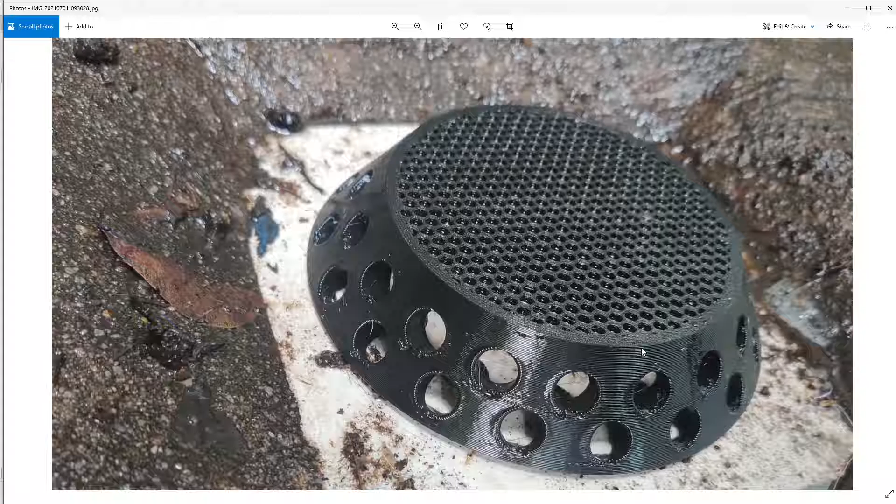Alright, that's where I ended up, that's what I printed out, that's what I got sitting on my basement steps. That looks like that. This has actually been working pretty well for about the last month, I've had no problems with it. Printed it in PETG, it's got some exposure to the UV. Printed it with a .6 millimeter nozzle. I got no complaints.